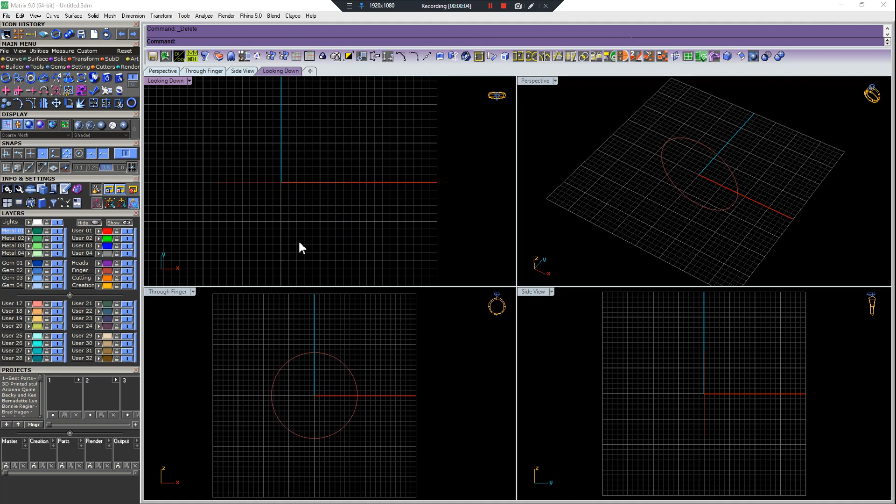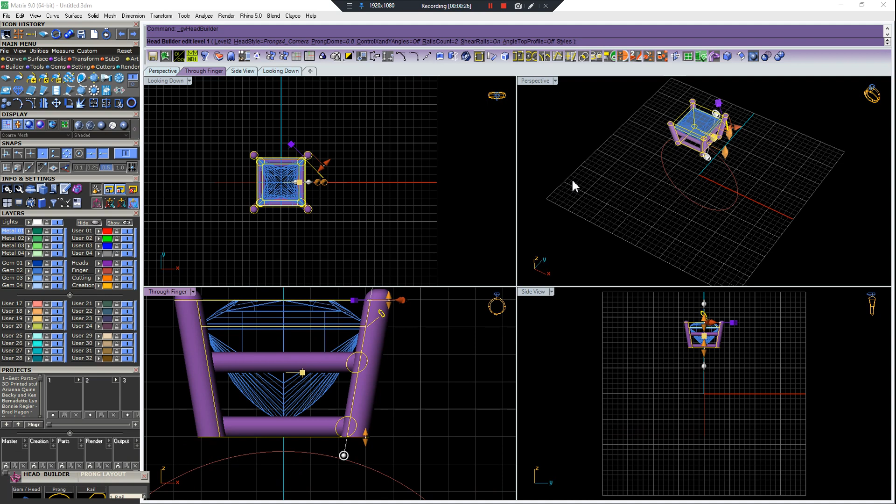That's what we're going to do. Building a fairly simple engagement ring that I've got all the specs set up for. It's honestly as simple as can be. He wants something really smooth and straight lines, princess cut. Yeah, you will just see how it goes. I don't really need to show you the picture.

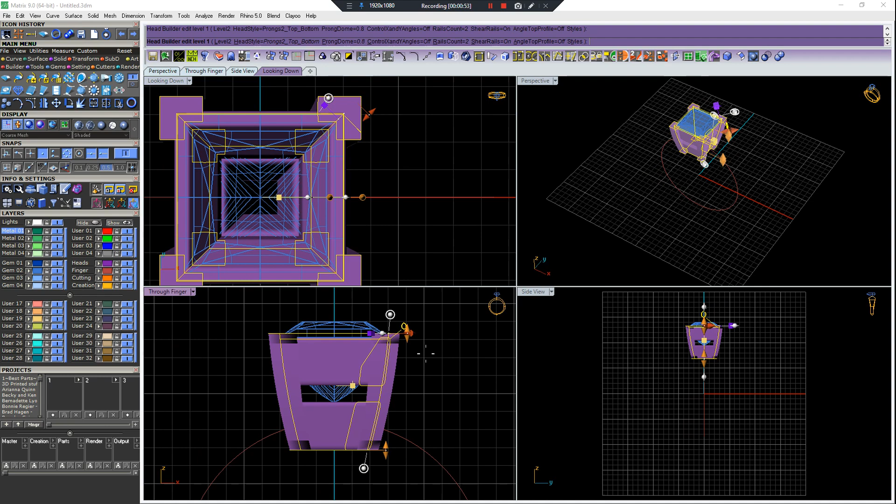One thing I wish, oops, I need the head builder back. Okay, this is not off to a smooth start here. Okay, there we go. I usually have all this set up on another screen, so it's throwing me off to have it all on one screen.

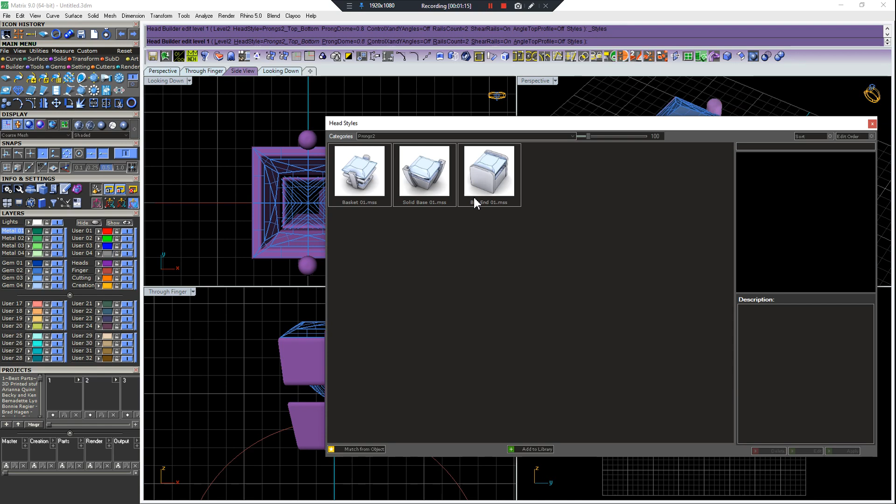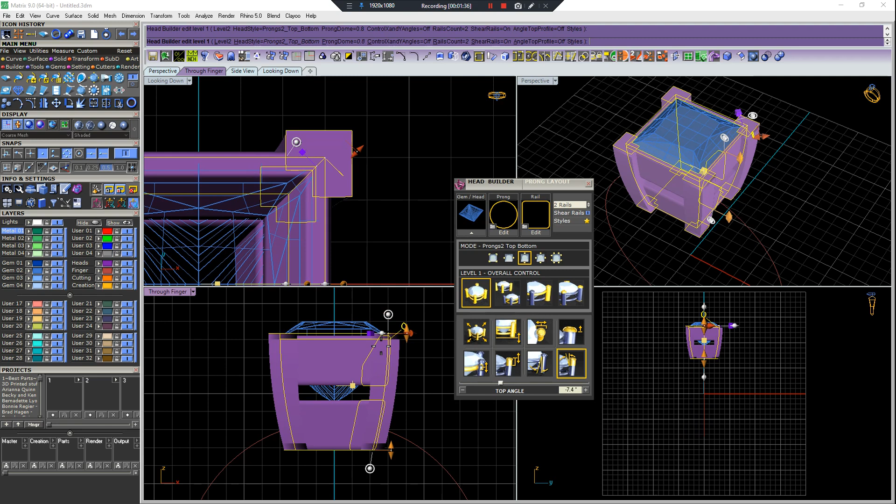Okay, so I've got some pre-made heads here, obviously. This is kind of my go-to head. I think we're gonna have two rails. Here's a bummer about the head builder. Maybe in Matrix Gold they've updated this, but when you scale the size of the claw, it scales the size of the rails. I always end up with these big fat rails that I gotta deal with separately. This is some major first world problems that I'm talking about, but you know, when you do enough rings, it just sucks a little bit.

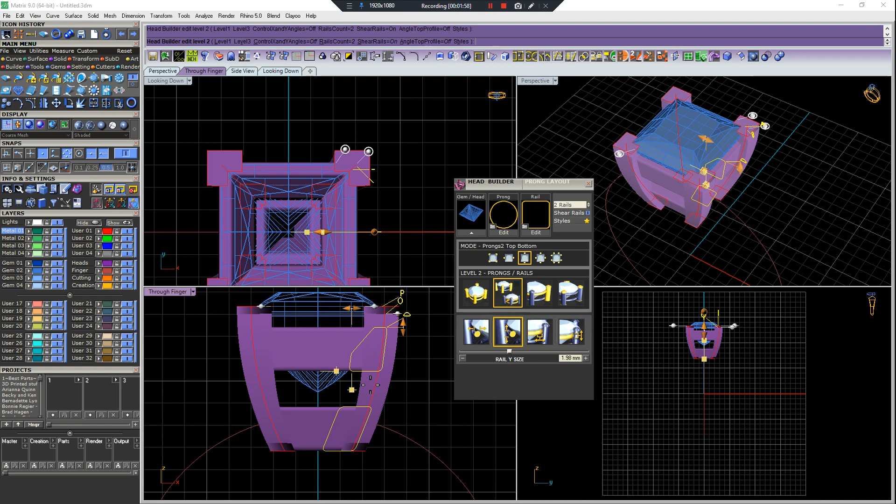But that's okay, we just come in here, select our rail level, tweak them down, so they don't leave extra material that you don't really need in there. A medium thickness, nothing too thick, nothing too thin.

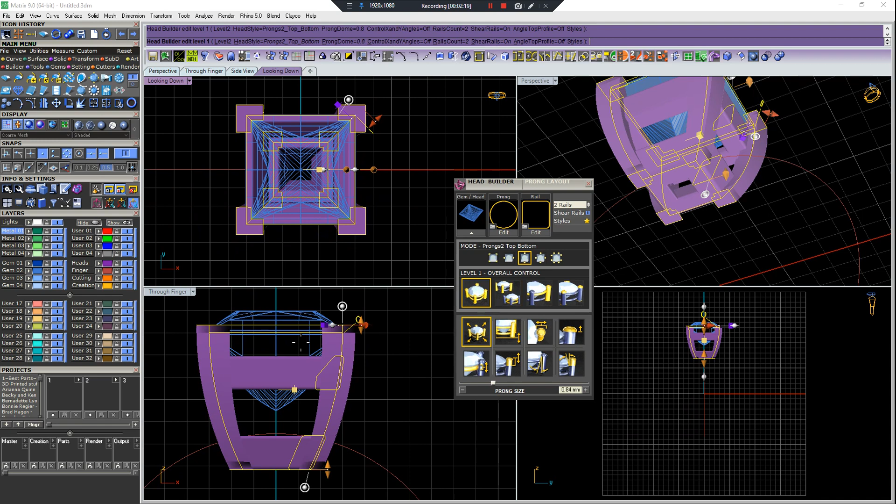Usually want your claw 0.8 to 1.2. This is a 6 mil stone, so it's a pretty good size stone. That's about where you want it, that's sort of the range.

A little bit of curvature. I don't like the claws straight like that very often. This sort of helps if the stone's got a bit of a belly, which most of them do, especially modern moissanites, man. Oval moissanites, what's going on with you lately? We even had some bunch of pear-shaped moissanites. They've been really kind of fat on the bottom, and I don't know why they're cut like that.

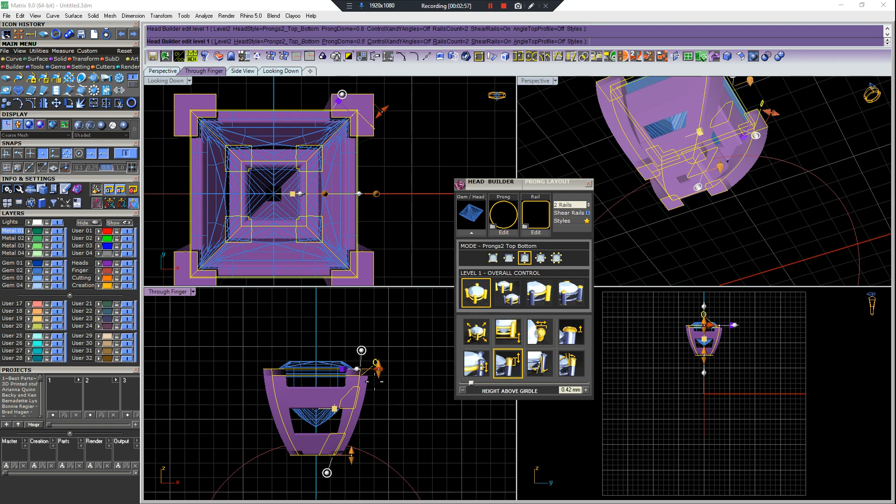But all right, this is a good start. I'm going to ungroup this, and I'm going to fillet the top of these claws. 0.2 is probably my kind of go-to fillet. It's sunken into the stone a little bit more than I would set it up to 3D print with, but enough to look good in the render.

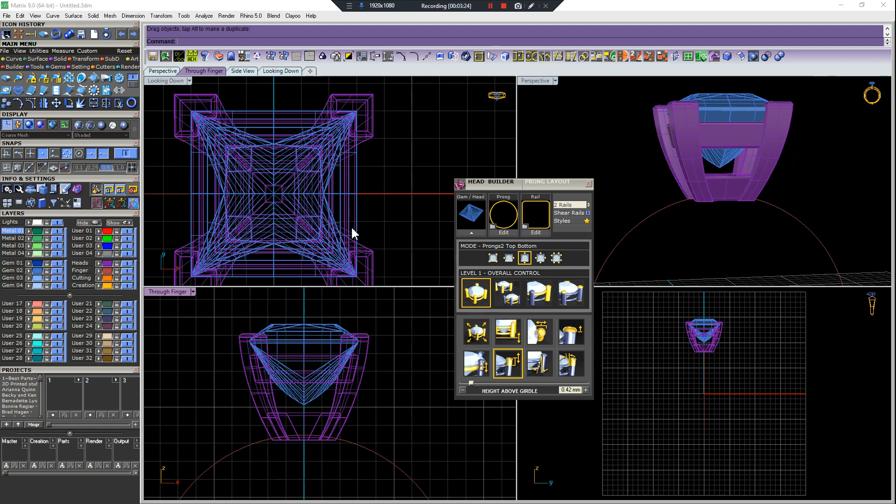And that's a nice bread and butter basket, 2-rail. Pardon the people that really know what they're talking about. If that's technically not a basket, if there's something about that that doesn't make it a basket, my apologies.

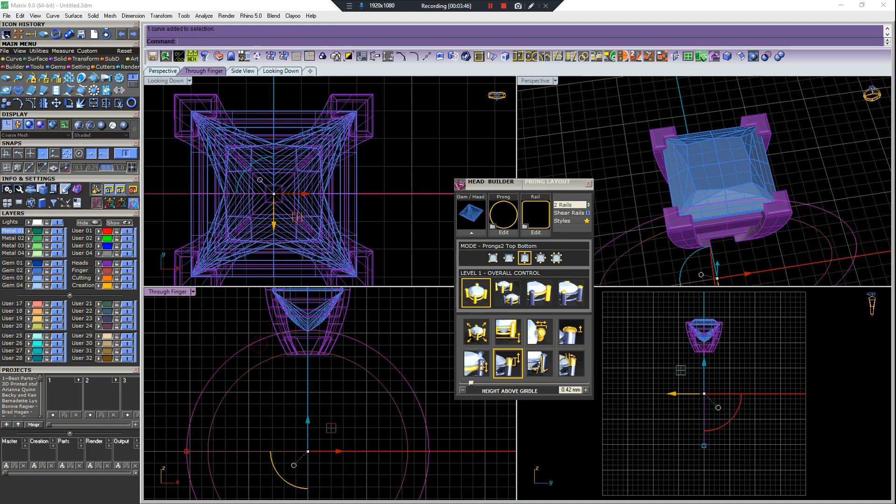Shank thickness, 1.5 to 1.8, I'm going to consider like middle of the road. That's sort of the Goldilocks zone. 2 mils is definitely heavy in most cases.

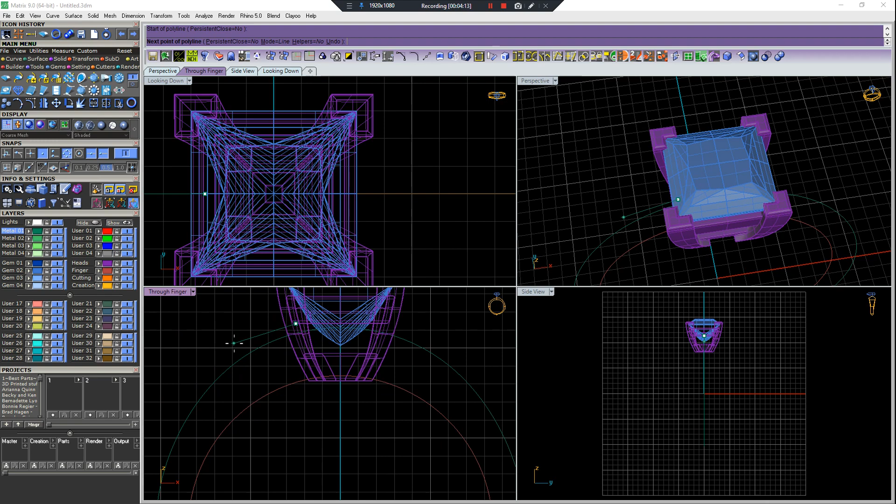But for most engagement rings that are everyday stuff, 1.5, and I'm talking through finger thickness here, obviously, 1.5 to 1.8, unless they want something extra big or extra thin. You can kind of use that as a reference.

The customer has 2 accent stones that we want to put in illusion settings. They are 2.7 mil.

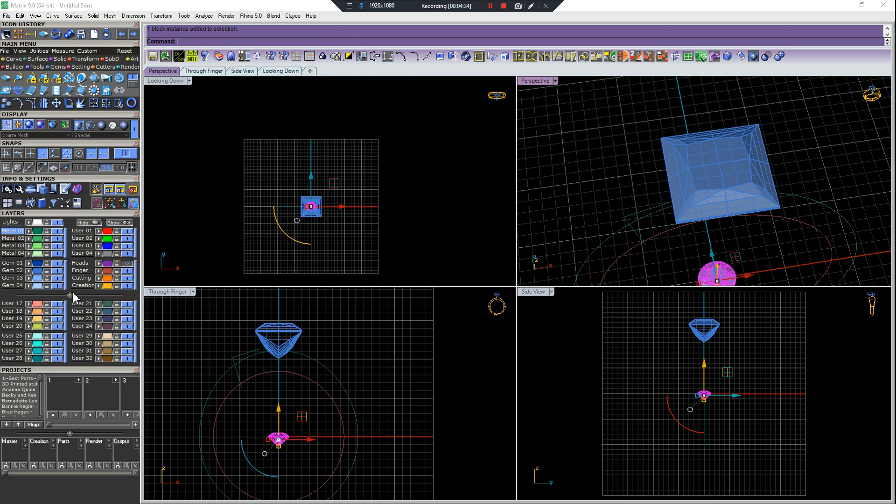And I'm just going to build this manually. There would be a few ways to. Is there an illusion plate builder? Not really, not really.

So I'm just using offset and, oops, don't know why that didn't have a cap on it, but this tool here, they taught me this when I very first started. Surface inset, select surface, select curve, depth. Yeah, that's a tool that will do what I'm going to do.

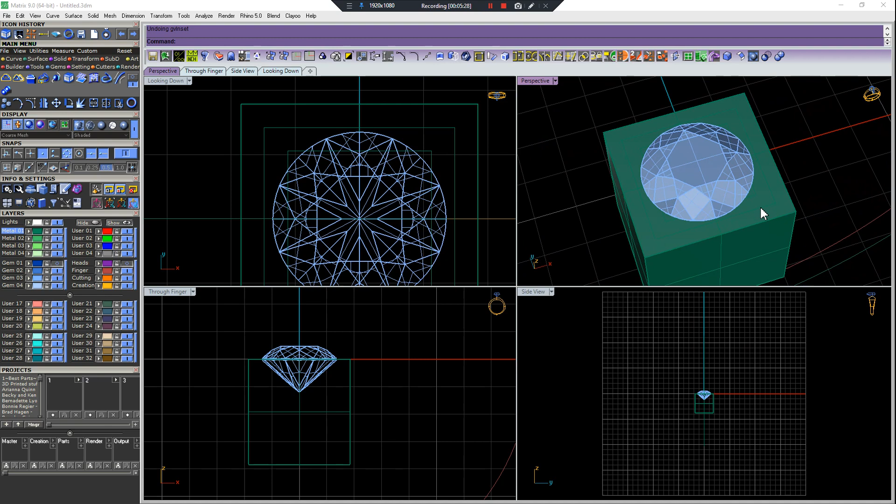But I found it wasn't really consistent. It wasn't great on curved surfaces, it just was a little finicky.

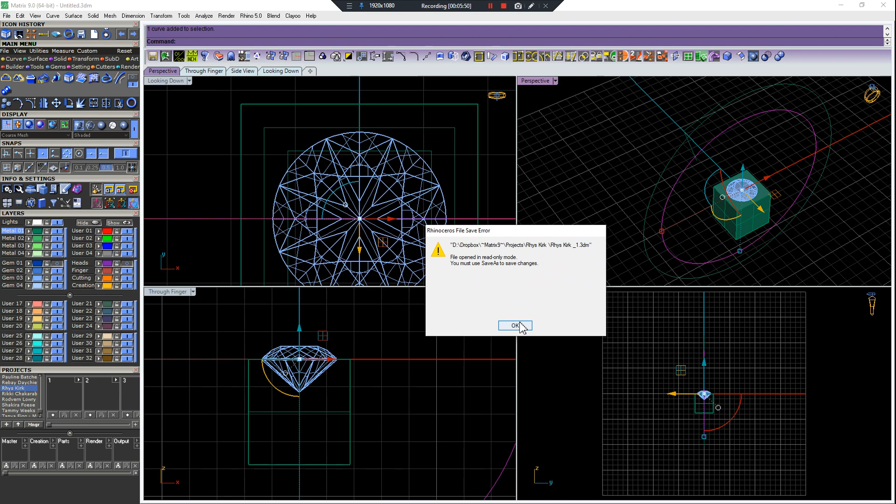One day somebody showed me like this is what the function is just doing. Ah, oh my God, okay, this error. This has been persistent, a lot of people have run into this.

I've got a new way of getting rid of it. I'm going to come here to the job bag manager. I'm going to import. Now there's extra jobs on here because I have two computers running and two of those are from jobs that my design partner Kelsey had built. I'm going to import them, and then this is the problem one. And it says, hey, blah, blah, blah, we're confused about this file. Hit delete.

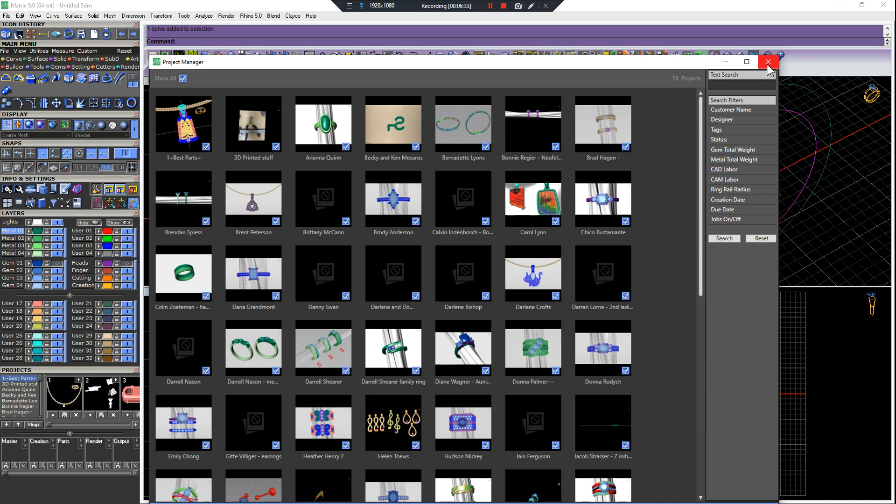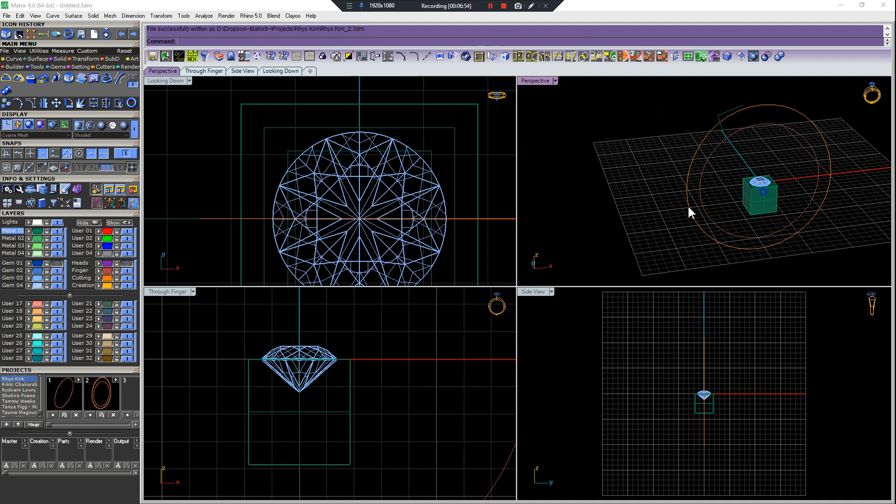And it'll do some thinking. Try not to click on anything because it's prone to crash at this moment. And then we'll see it's a little bit unresponsive. And there it is. Now let's try to throw something in there. And now it works. I was taught originally just to rename the file, and sometimes that worked, and sometimes it doesn't.

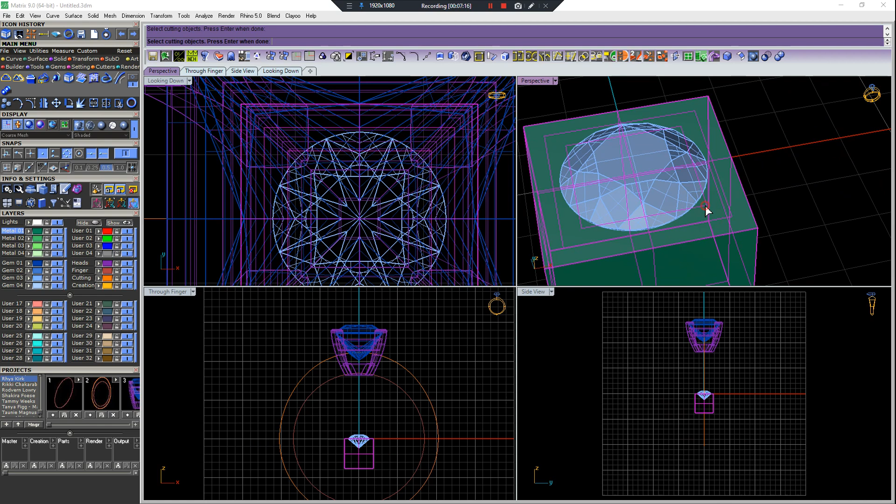So that sucks, but that is a way that will fix it every time. I don't know the cause of the error. I've talked to some very high up people in GemVision about it for many years, and they're all just like, I don't know, never heard of it. But some people definitely have that. It's weird. It's when you create a new file, create a new job bag, and you go to put something in it, and it doesn't cooperate.

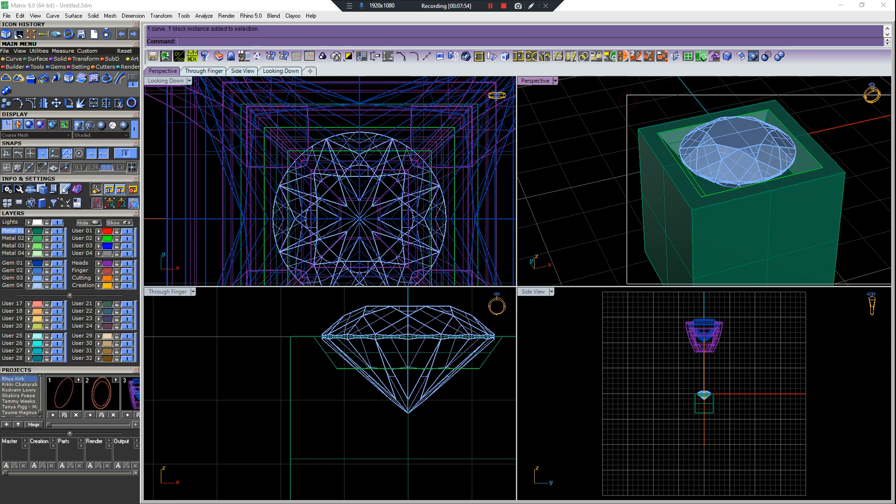So check this, let me make these a little bit brighter colors so we can see what's going on. There's a million ways to throw a curve on a surface. Obviously we have a very simple shape here, so it's easy as pie that I can take the outer shape, offset it in. But we've got curves in both places, and we've got this inner surface. I'm just going to drag this down to the depth I want, and I'm going to loft those. It's just, for me, a quicker and more controlled way to do a nice inset.

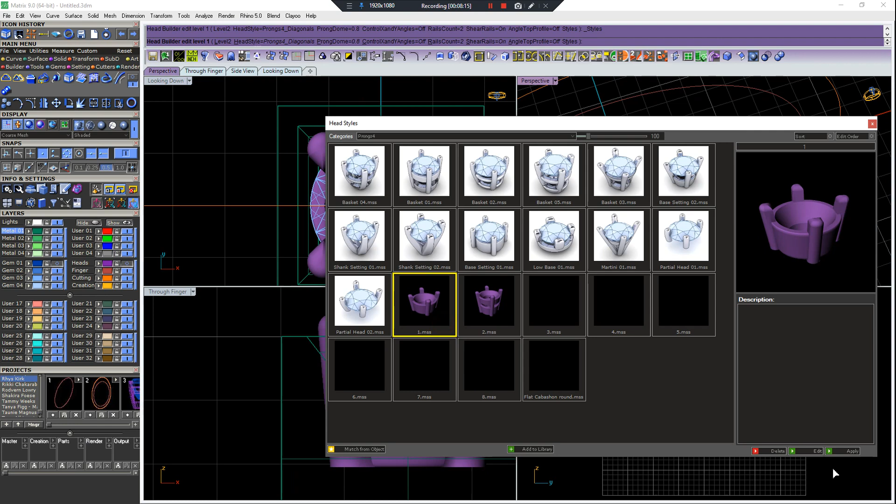And the other nice thing is I can just scale that up. Let's throw, I want 4 prongs on this. I'm just going to use a head builder without a rail. Rail count 0. And there we go. Job bag that.

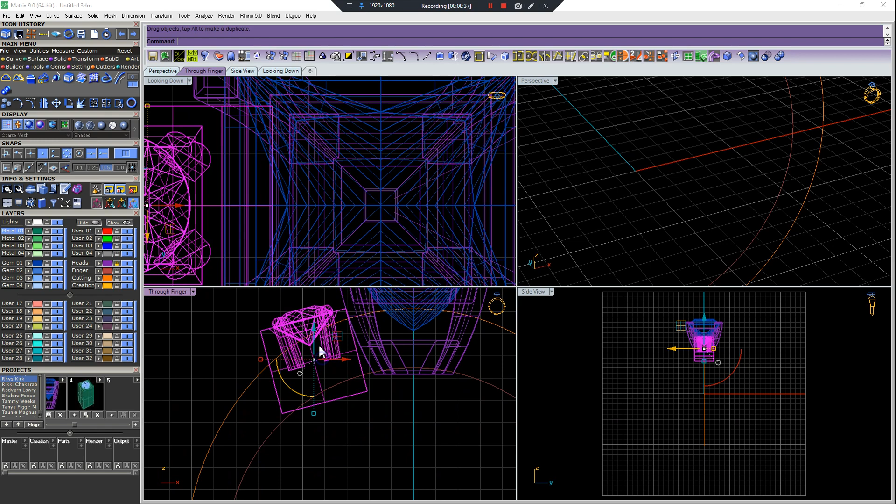All right, back to my favorite function. I'm going to cage edit this guy. I can also with this cage edit, throw a bit of a taper on it. Whenever you're cage editing, grab 2 and then grab the bottom one, and that's how you can get a nice gradual taper.

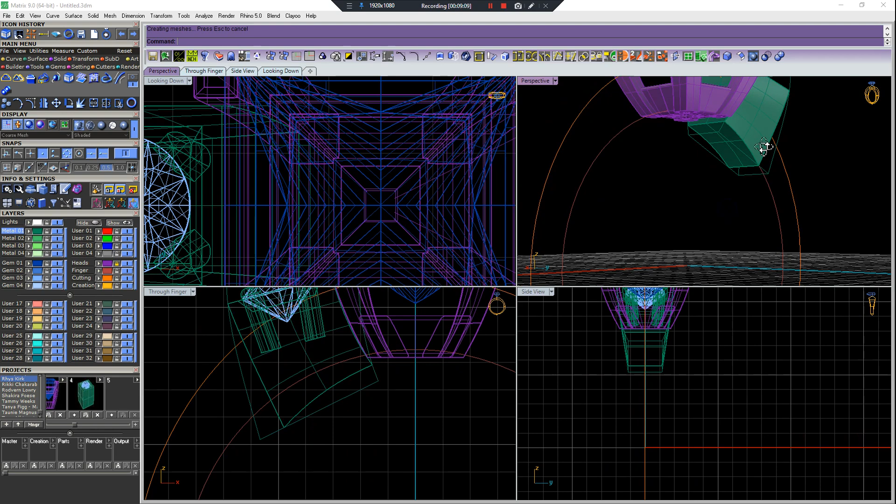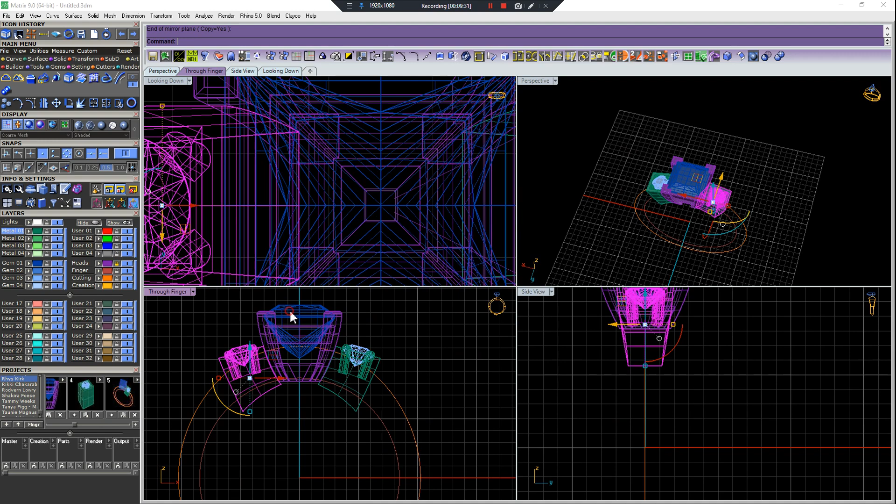And the benefit of cage edit is that, let's say you want it a little bit wider in the back - you've just got so much control. I don't want that, which is why I love it so much, and I use it a lot. Some people may call it cheating. I am totally cool with that.

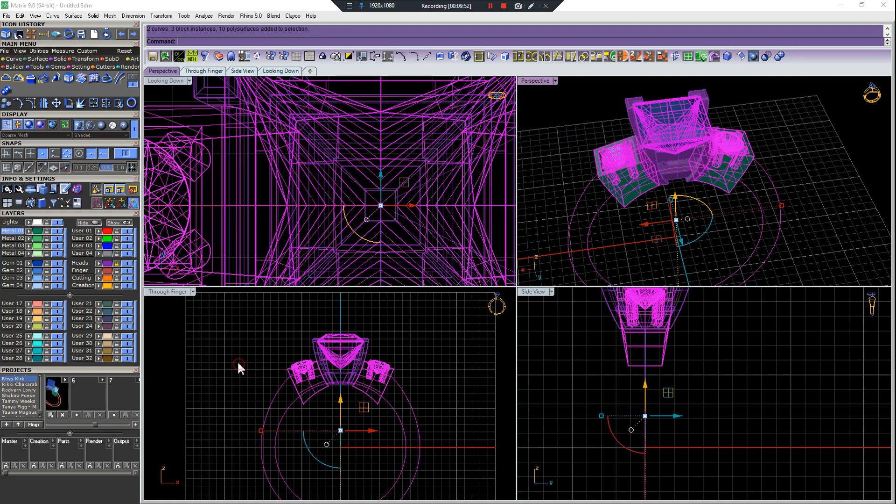Here's my favorite outside ring rail. Give it 10 points, I don't know why. 10 seems like the magic number where it can keep a nice shape - you always want as little points as possible while still being able to get the desired shape that you want. And 10 is just the magic number for some reason.

Simple. Oh, okay, I have solid off, I want solid on. That is what the customer wants. Simple, simple as can be. Boolean difference with those two heads.

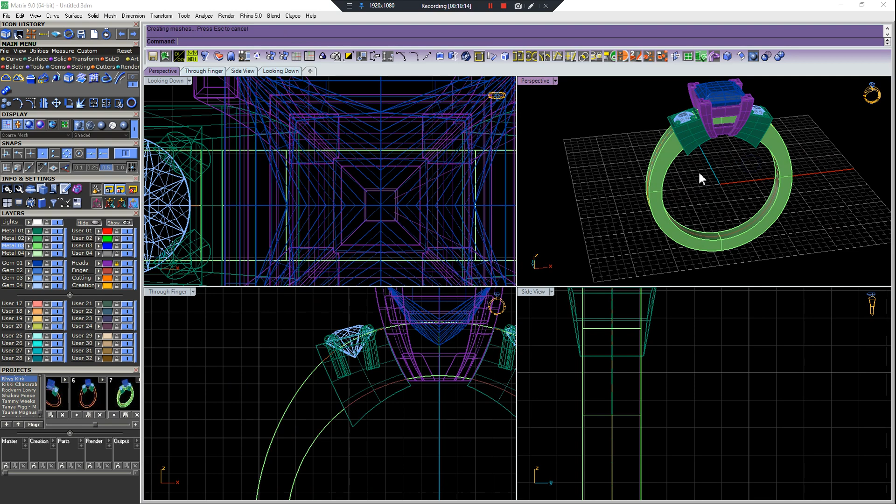Clean up my mess in the middle. Oh, we got a little bit of mess inside here. Yoink, yoink. Cut to ring rail.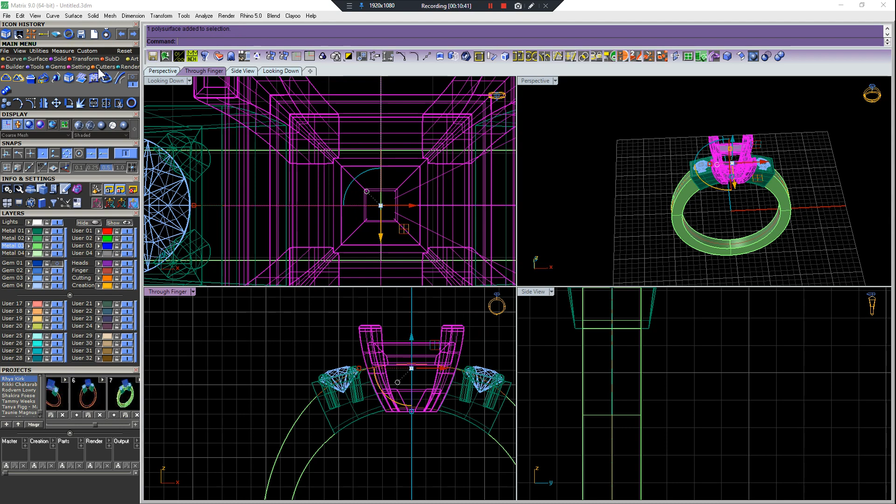And here's another trick I like to do. I don't know if any of you have seen this tool where you grab - oops, what do we got going on? Locked layer, there's your problem. Come in here to settings, we've got pull object to rail. And the way they teach it to you is you grab your setting and you pull it to the rail, and that's great - it curves it nice and easy, very handy tool.

I don't like this top rail curved, so I will grab these three and then do that. And that's much better looking.

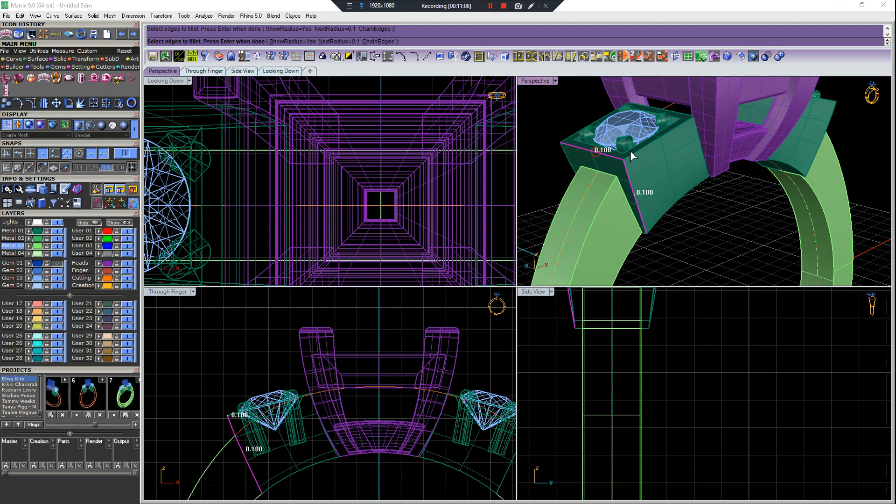Okay, so what we're gonna do is we want a nice soft, a very light fillet on the top and these sides. I don't think there's any benefit to having - let's go ahead, let's taper those. And then I want this one and this one to be much stronger. Now, I can't do those separately because as soon as I do, it this direction isn't going to want to fillet.

So we'll come here and we'll see - I can manually drag this. Actually, that's not a bad idea. Let's do 0.36, and then let's grab this one and do 0.36 as well.

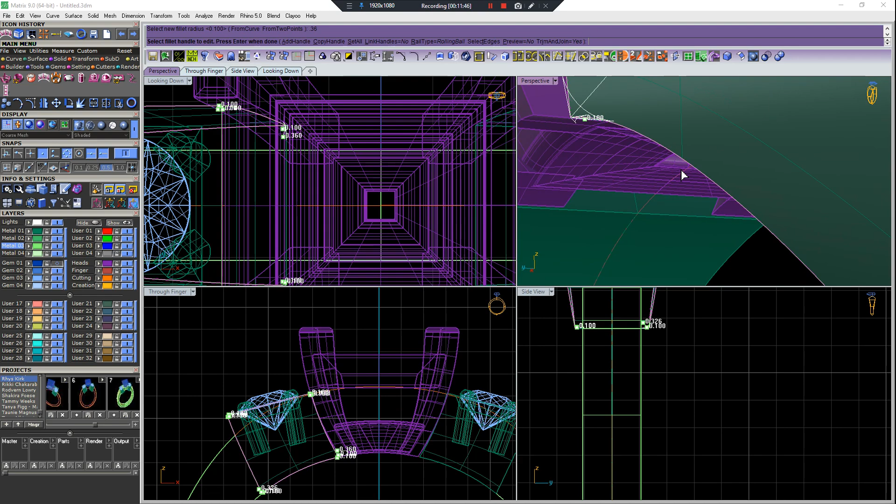Very nice. And for me, it's less clicks to chop this guy in half than it is to go in and fillet that other, do the same thing to the other side.

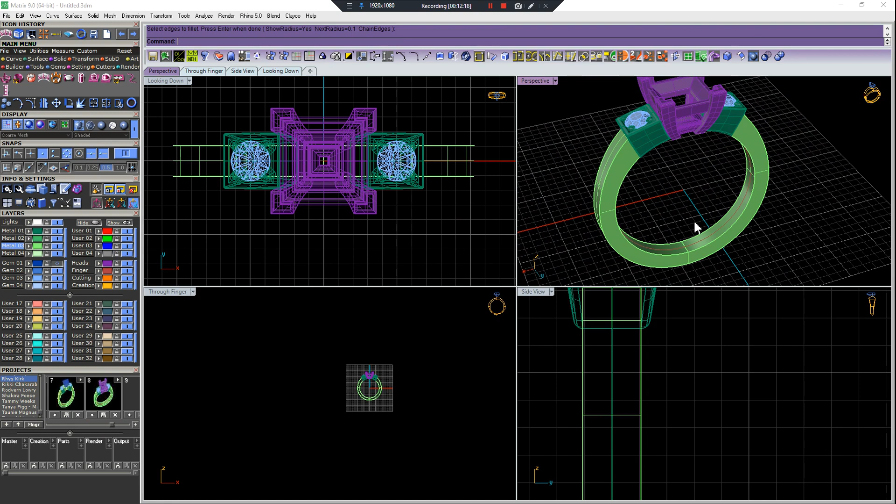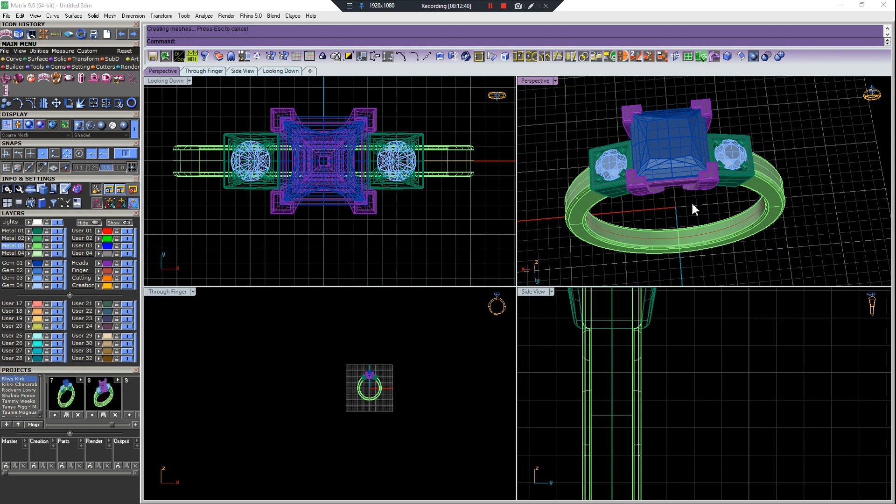And you may ask, why did you build two and then just delete one and then make another one to the other side? When you have mirror, rotate and everything set up in your macro pad in your left hand, it's literally just 2 clicks, a blink of the eye to mirror it, and it lets you visualize better. We're just designing on the fly.

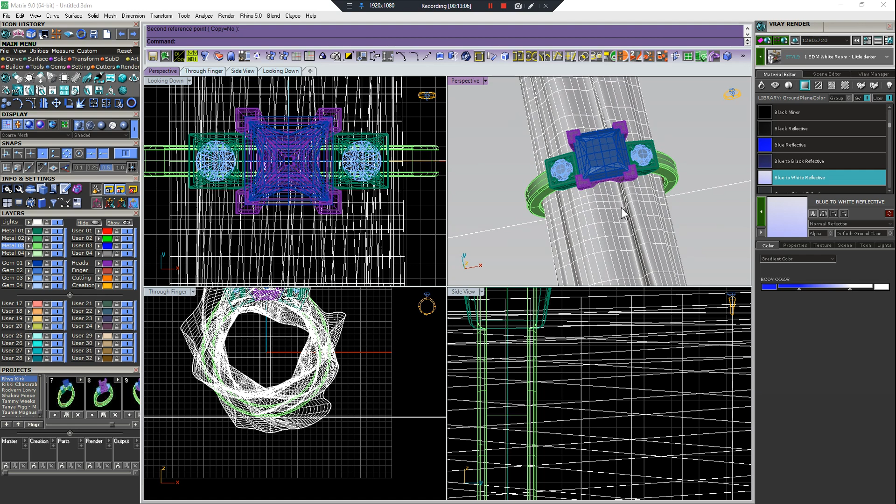And yeah, I'm happy with that. Here's my, and we're going to do a very basic render. Here's my system. We'll do ground plane, throw the sleeve in there. The sleeve already, it's basically in a file that you can't see that I just dragged in here. It already has the materials applied to it, and it will save that as a 3DM by itself. So it's got the material applied.

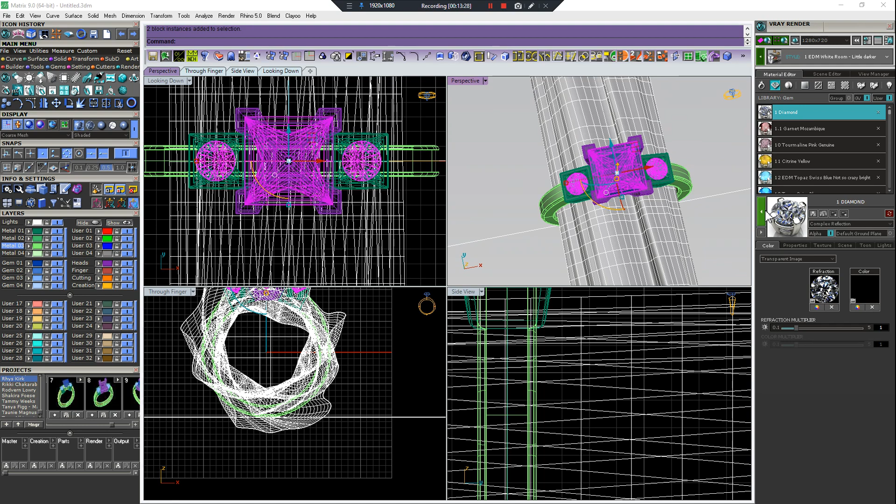We want gray, white, black, go easy on the black, be selective on the black. Ground planes, we don't want anything too colorful, we don't want anything too distracting. If we're doing something crazy for fun or for show, go nuts. But if the goal of what we're doing is to convey to a customer what this ring is going to look like...

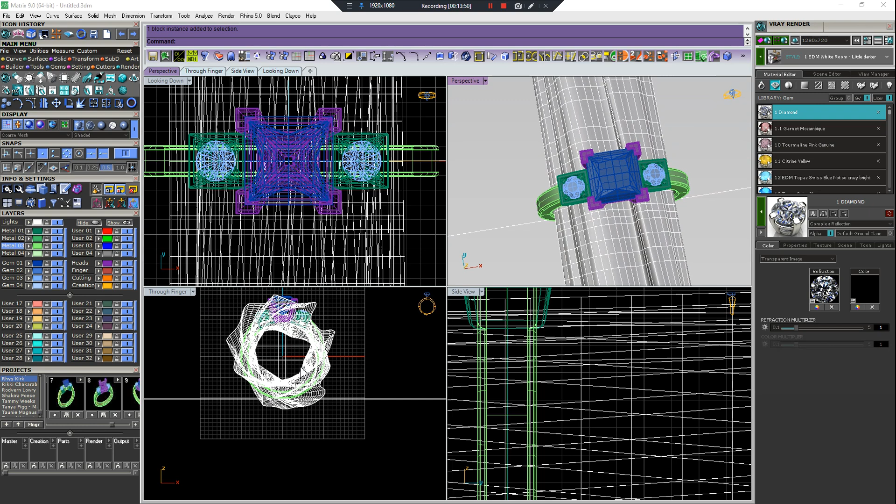KISS, keep it simple, stupid, for sure. No, silly, no. Nobody's calling anybody stupid around here. We're all just learning. Keep it simple, yo. KISY. Kissy, yeah. Kissy.

Okay, another trick. Let's get the Z cage edit and let's grab that top and let's bend it in just a little bit, just to look a little bit more realistic. You see what's going on there.

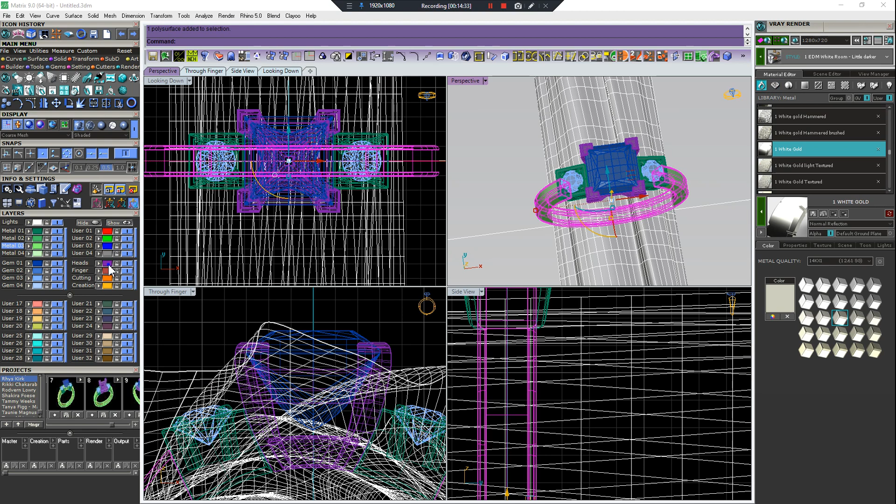Oops. Okay, I think we've got, did I apply all the materials? I think so. Did I remember to do the stones? Let's double do it just in case. I'm too busy chatting with you to remember what I'm doing, paying attention to what I'm doing here. I'm usually listening to podcasts or watching YouTube videos or something while I'm doing this.

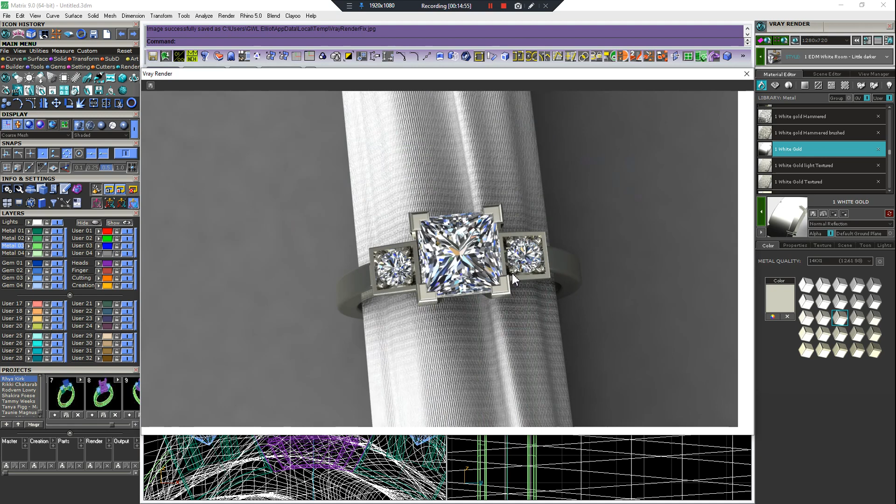A little bit of an angle. Nice. Easy peasy. If you want to get real fancy, you can extract those inner surfaces, give them a tiny bit of a brush finish. I don't think we need to sweat it in this situation.

I'm going to pause this to save it.

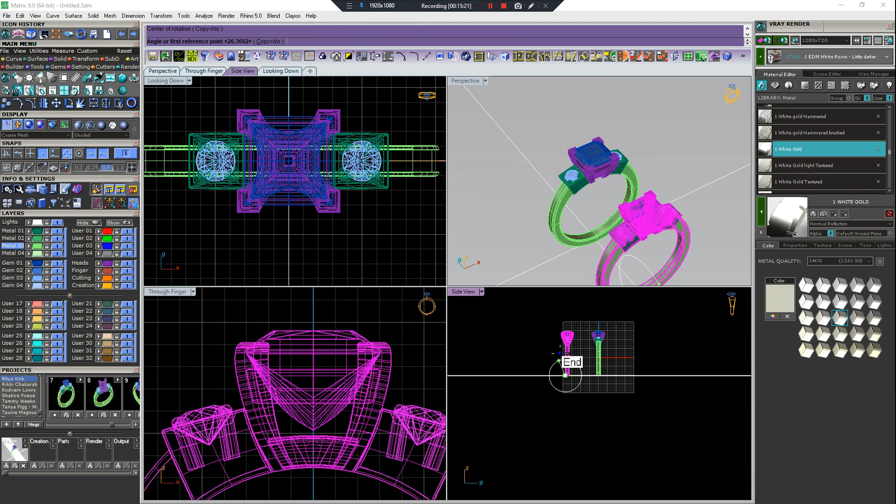All right, so now that everything's applied, we're gonna throw it in a master, and we're gonna copy, rotate it so that it looks like it's touching.

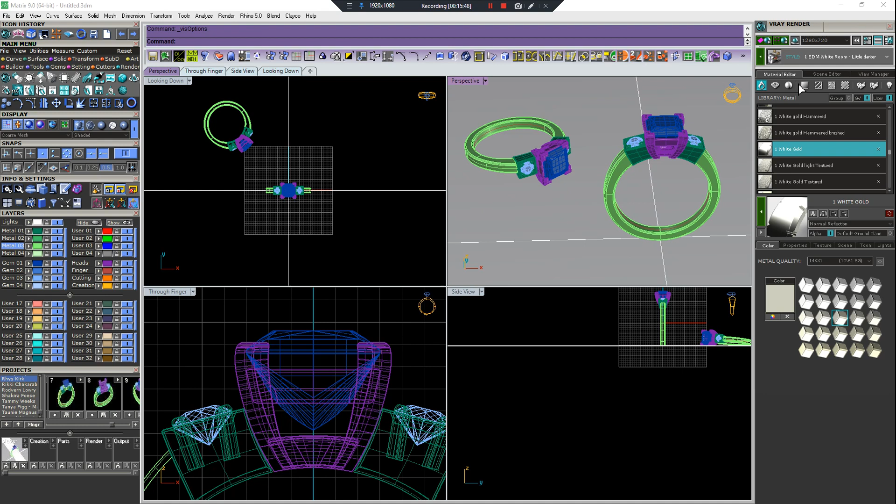You know what? This render was so quick. I'm gonna show you how we're gonna deck this render out a little bit. What we're gonna do is we're gonna use depth of field. I find there's a bunch of photography features that can help make things look realistic and cool. This one is the simplest and I think does the best job and is kind of the quickest.

I've got my scene edited, so it's already got some depth of field, but I'm going to show you how to manually do it. I don't have fantastic luck doing it any other way.

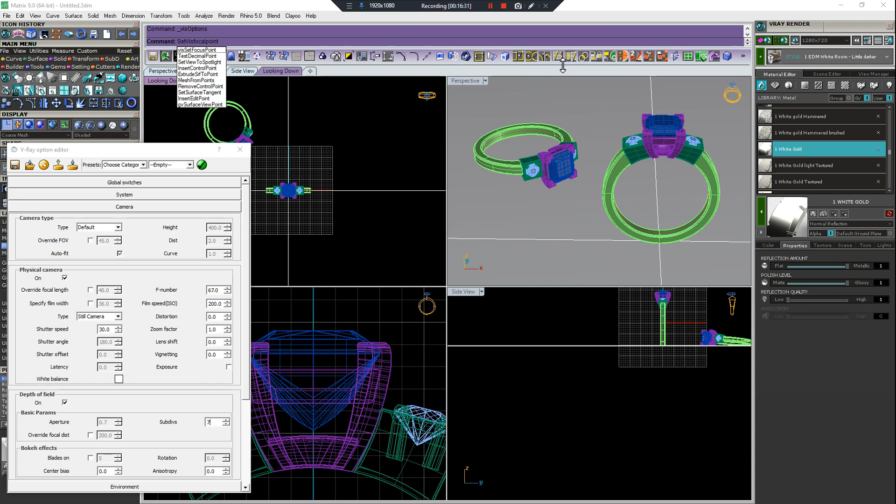So I'm just going to come in here into camera, turn the depth of field on. This is how strong it is, your subdivision here. So 6 is nice, it's a nice soft effect. I'm going to turn it to like a 7 just to exaggerate it a little bit. And here's the key to the operation, a hidden function: set viz focal point right there. Viz set focus point.

You have to be in the correct perspective viewport, and then you get a little dot here, and this is where you're going to focus. So if you want to focus on this one or this one, let's focus on the front one, so we'll focus on the stone.

That's the most logical place to do it. Let's take this and move it. Let's move this back just a little bit and render. I render by 1280 by 720.

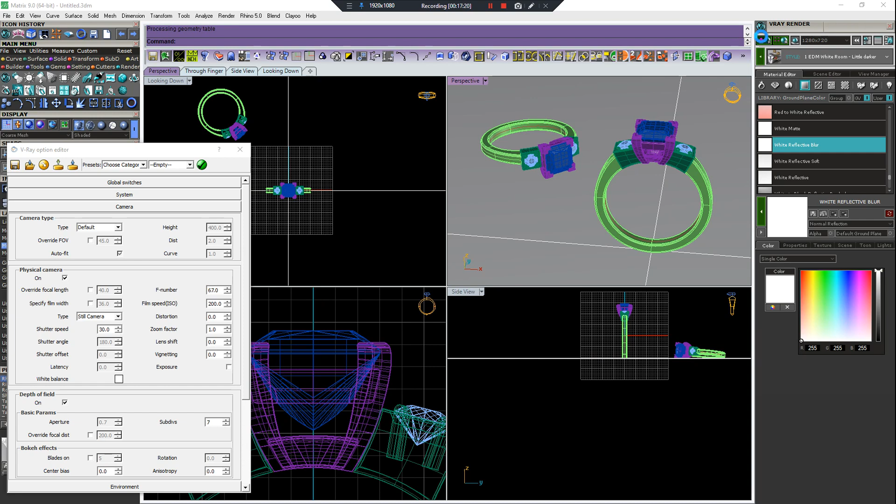Okay, that background's too dark for what I would like to do. Let's do something white and reflective. Actually, no, sometimes that's a little harsh. Let's do a blur. Okay, here we go, let's try this again. A little harsh, but this will show what I'm trying to do well.

Okay, one thing you'll notice, render is taking 10 times longer than usual. That's all the math it has to do to make this depth of field work. I'm going to pause it for a second and pull the finished cake out of the oven shortly here. Ta-da!

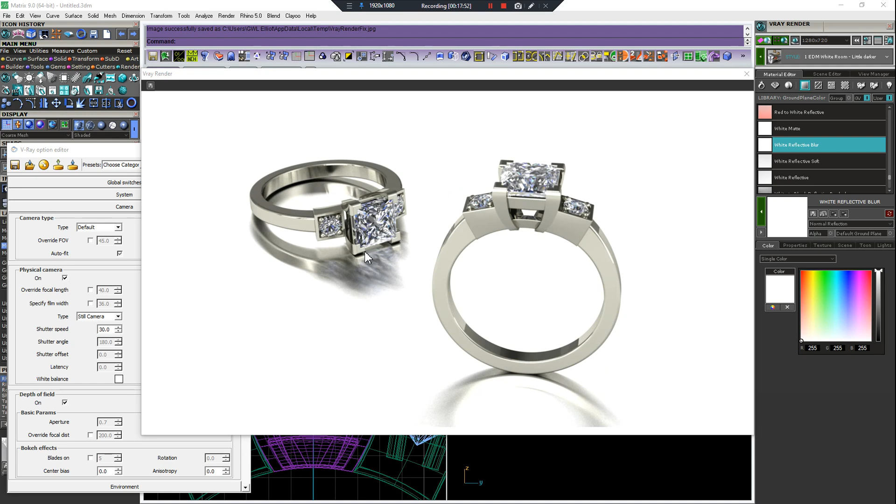It's kind of faint, maybe I should crank up the depth of field. Okay, so I changed things around a little bit. I set the focus point on the rear one because I figured it would make a stronger effect. I also pumped the subdivisions up to 9, and now you can kind of see a lot more clearly how there's way more difference, or the depth of field effect is a lot stronger.

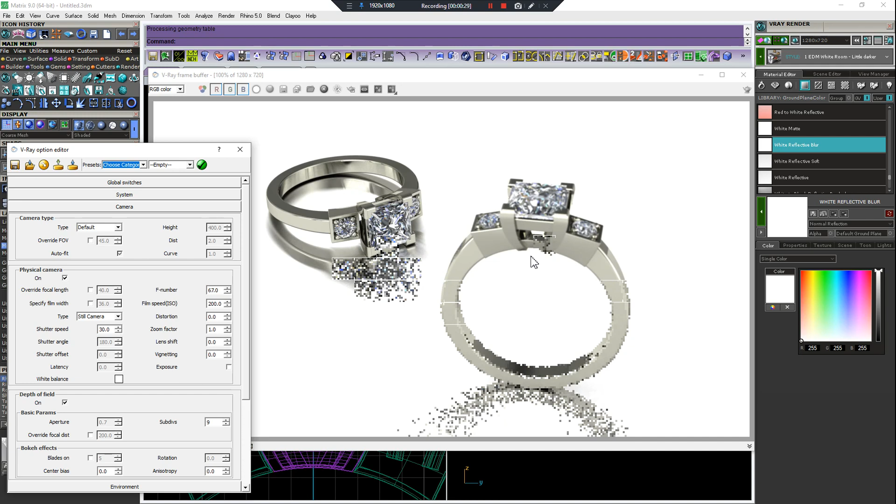You can tone it down for a more subtle look, which usually looks better. You don't want to make something blurry and send it to the customer, but if you're doing some nice renders or you've got a really primo piece that you're wanting to do some killer renders, this is what I like to use. So it's just about done.

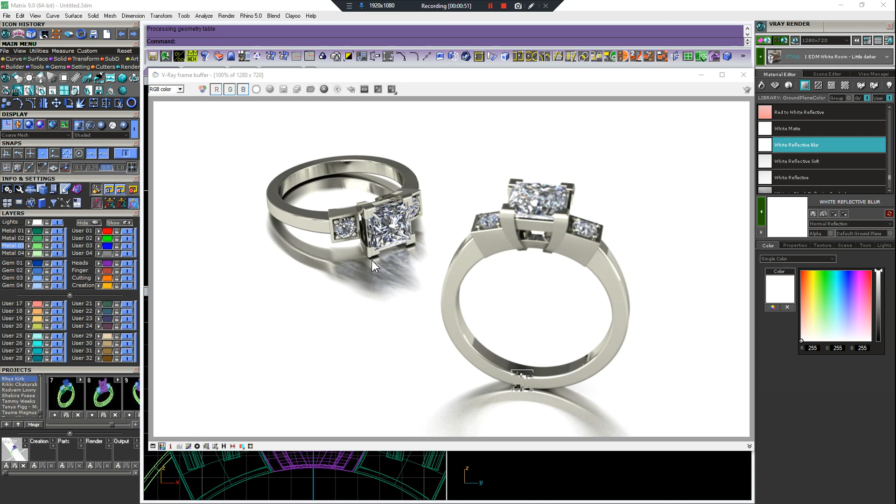I'm going to keep it going instead of pausing it. All right, that's pretty much it for, oh no, I got to do one more thing. One more thing really quickly. Okay, so the customer wants to see it with a 6 mil and a 6.5 mil.

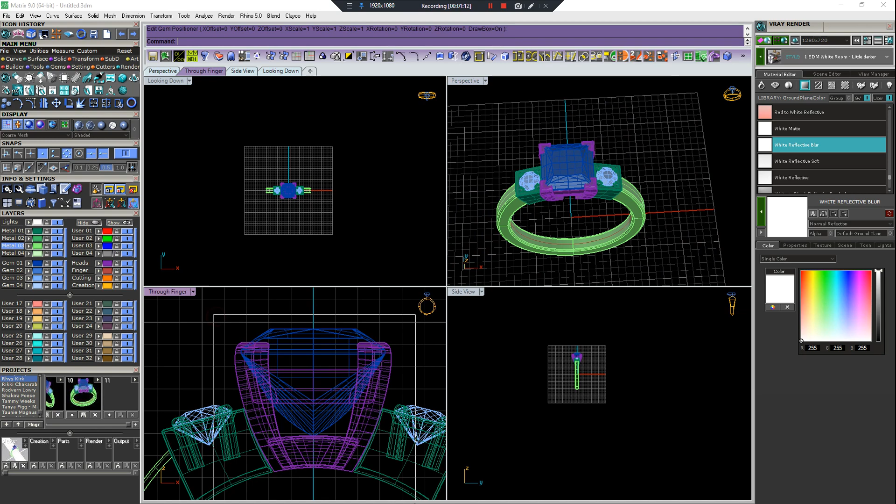And this should be a very easy change. I can MSR this up a little bit. Okay, and then I'm just going to grab the setting head. I'm just going to 3D scale it.

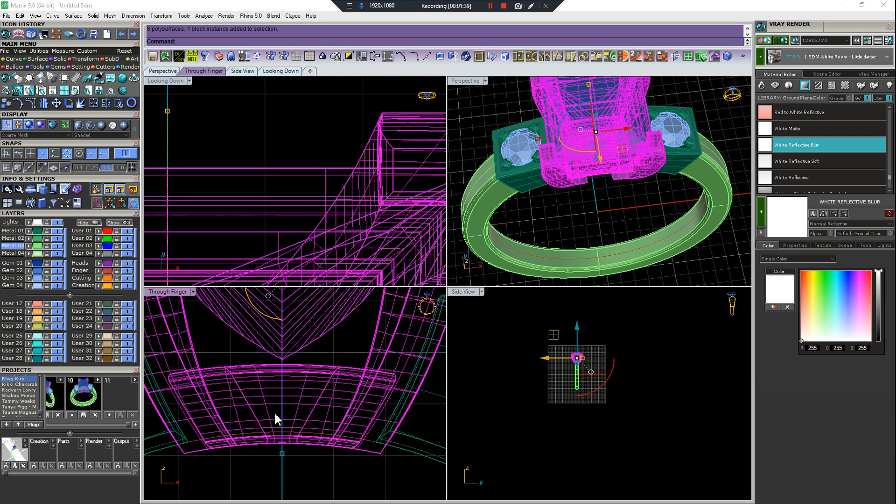And then I'm going to 2D scale it till it's sitting about the same amount into the claws as before. I don't need to make it a lot taller, but I want to make it a hair taller. Just lift that up. I'm going to also just scale this 1D down a little bit too so that I can bring this up.

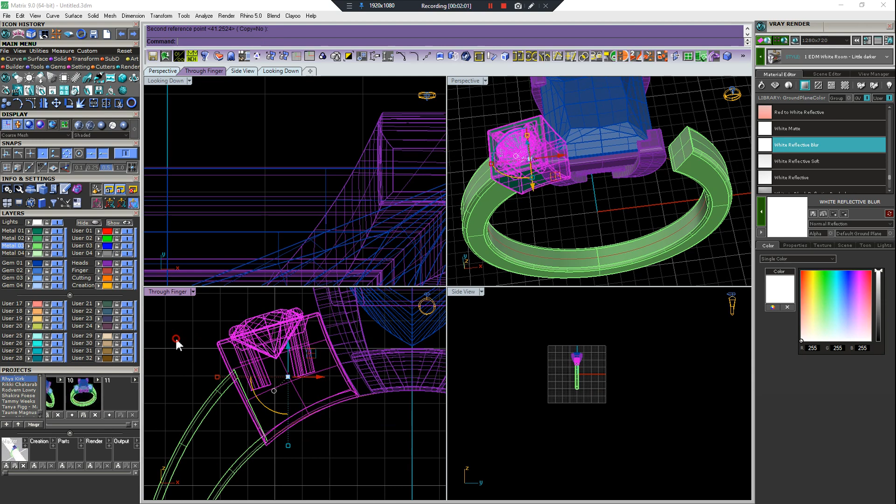You might be, if you're really picky, you might be saying like, oh, that's not perfect anymore, you scaled it. It is close enough, we're talking tiny, tiny little differences that it's like one swipe of the sandpaper and it'll be gone.

I'm going to split this in the bottom and then just rotate it out. That needed barely anything, I probably didn't even have to do that, but that's okay. It's a technique I wanted to show you.

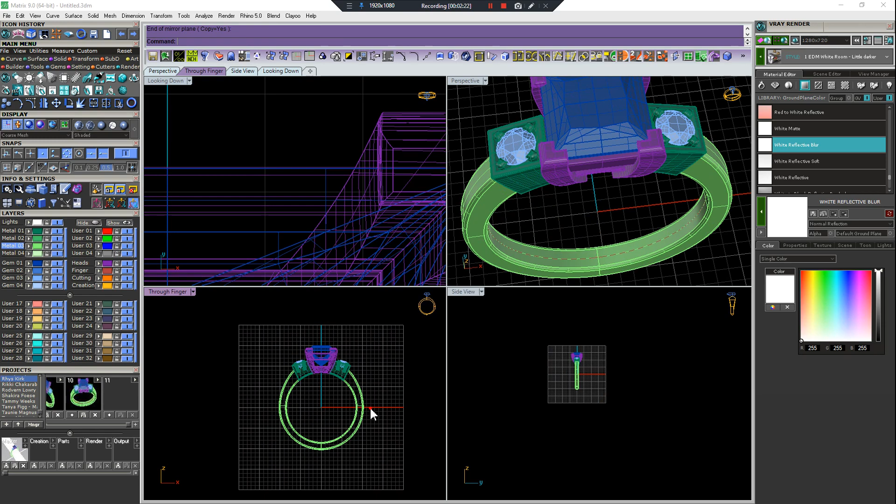And then I will change the color of this shank so I can kind of tell which one's which. And then I will bring this guy out, throw the ground plane up again.

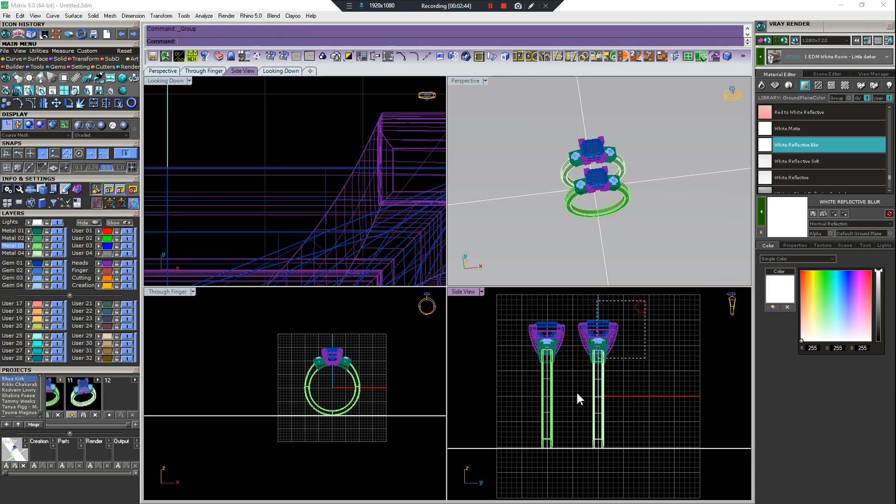And because I MSR'd that stone, I'm going to group these, make it a little bit easier to click on. Now, because I MSR'd that center stone, it already has the materials applied, which saves me a quick little step. So I can just scale it, and all of this has the material applied already. So it's ready to render at this point.

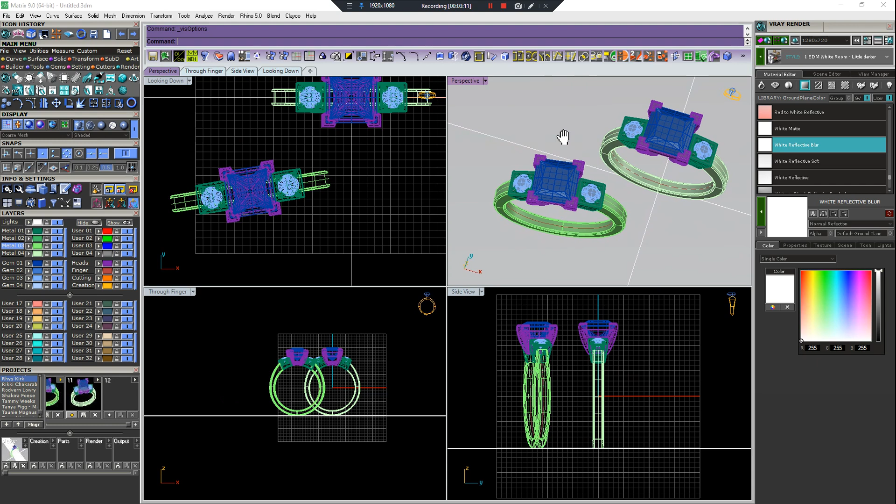I'm going to come here and turn my depth of field off because I'm not messing with that anymore. And just have these set up so that they're close together so that the customer can more clearly see the difference between the two sizes.

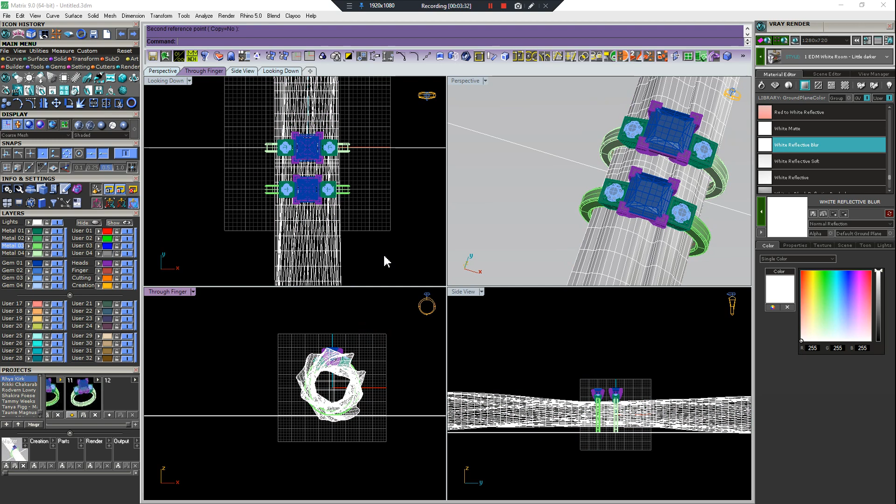I will also throw them on the sleeve so that I can render them side by side, which I like as well. Kind of an angle like this. And that's a good way to show the difference as well.

All right, easy peasy, nothing to it. I hope you learned something. If you didn't, that's fine. We had a good time together. We had some time. All right, I'm out.